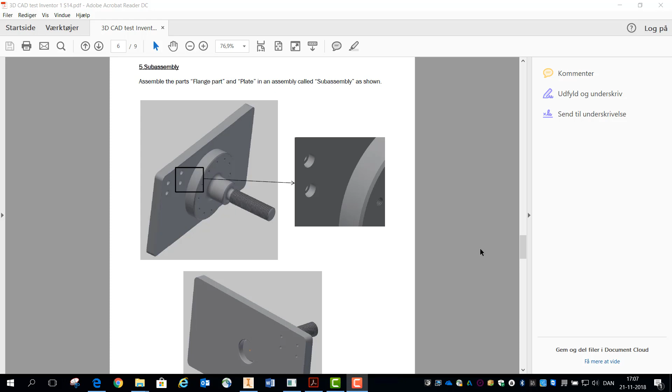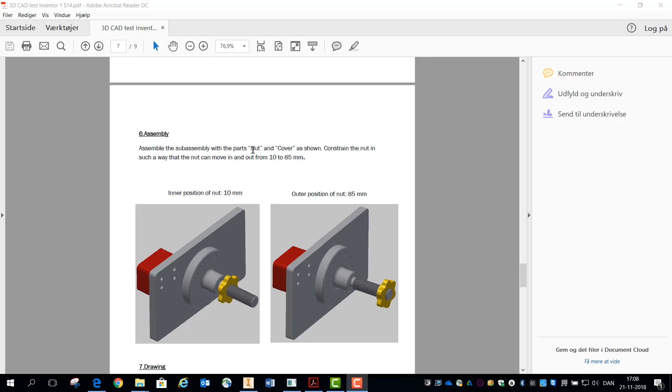So this is part 5 of the videos concerning this test, spring 2014. I'll now look into how we can do the assemblies. In the test we have a sub-assembly between the flange part and the plate, and then we will put the sub-assembly into a top assembly, we will say, where we also add the nut and the cover.

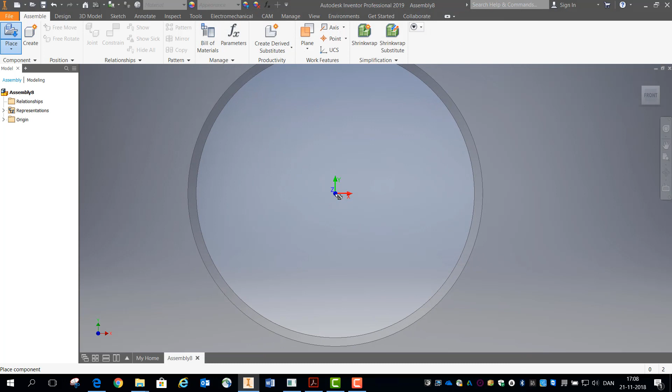But we'll start with the sub-assembly, and I will place up here my first part. I will browse for it, and I've saved it here, and I have my plate already in the window. And the first thing I'll do is actually place it grounded at origin. It's quite often a good idea. See what happens. We can carry on adding. I want to finish here.

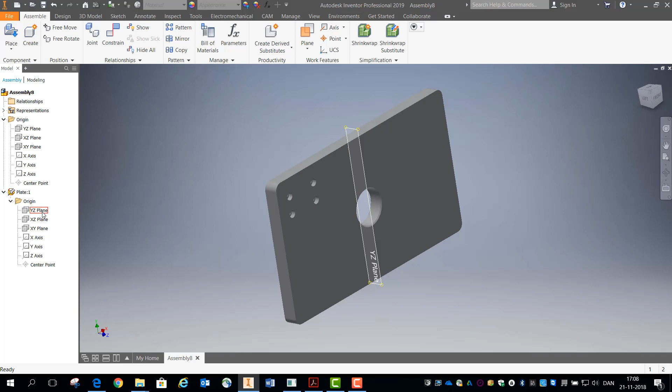So my first part is now placed grounded, you see, with that pin mark. And it means actually that you can see the XY plane on the parts and the startup origin is in the same level. So that's what it means. It is grounded now. It is not constrained really, but we just fixed it at that specific place, which is in the startup origin. You can see what happens if we take away the grounding.

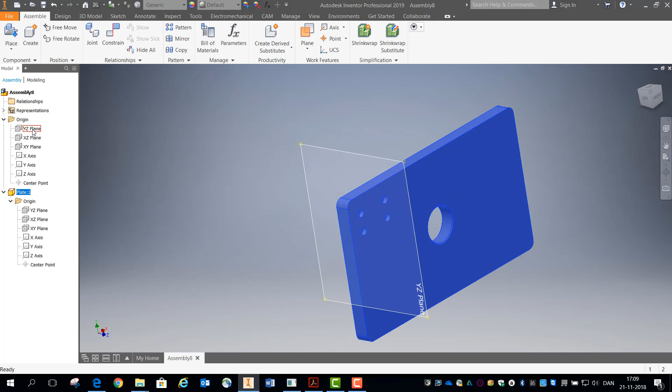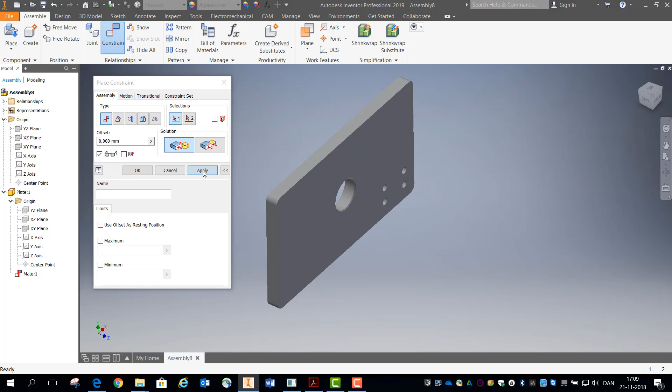Then we can actually move it, and you can see we have lost our connection to the startup planes. If you want a proper constraining, we can of course do that later. So if I now mate the startup YZ plane to the part, apply it. Same for XZ, apply. Also for XY, like that. And if I now apply it, it will probably complain.

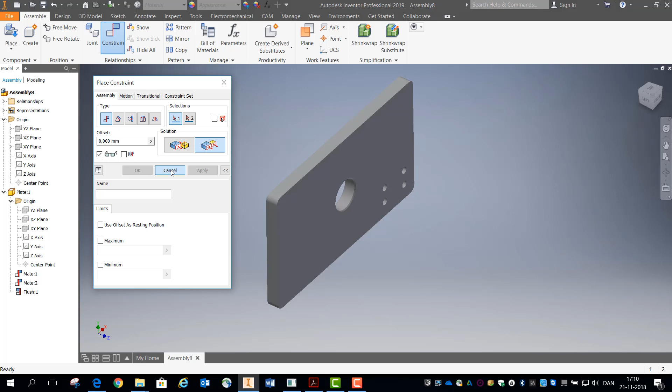And this is because I can't make it mated to each other, so I have to make it flush. So I do it again, XY and XY. It works better. So we're now back to the constraining. We don't really need to do the pin marks, the grounding, but we can actually do it. It's quite often a good idea that we ground the first part.

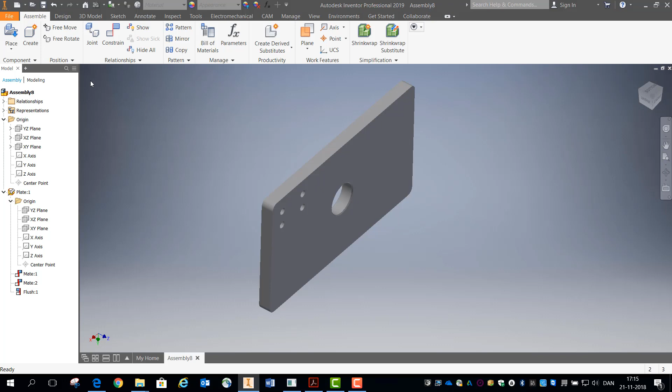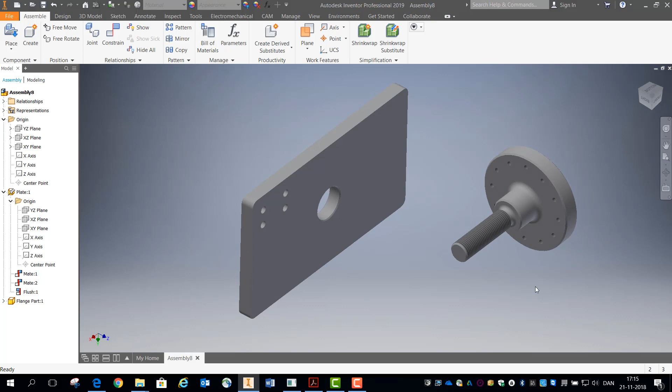Next I will add the flange part, so I place the new one, this one. I just click a random place, and then I can place more if I want. I want to finish here and leave my flange part here. First thing I would like to do, we can do several things here. We can constrain mate that to that one, and then we can add constraints between the planes, for example. So I could do that, or we could also use the joint option.

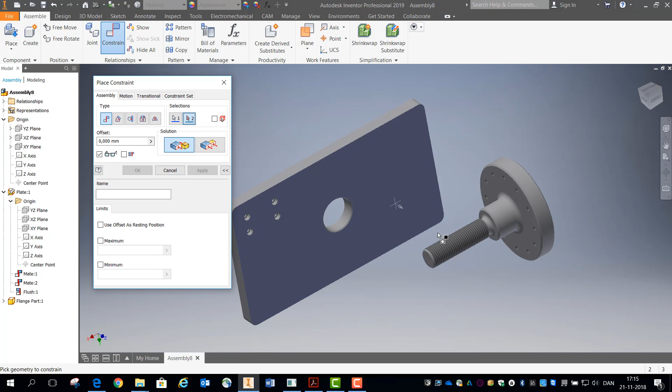I try with the mate option. So onto here. It's fine. Then I would like to mate the planes. Fine could be the YZ plane on the plate to find the origin on the flange part. It shouldn't be the YZ plane, but yeah, it could be anyway. It could be this XY plane, for example, or XZ. See what happens if I choose XZ. Do it like that. If I choose flush, it will turn it around like that. It's okay.

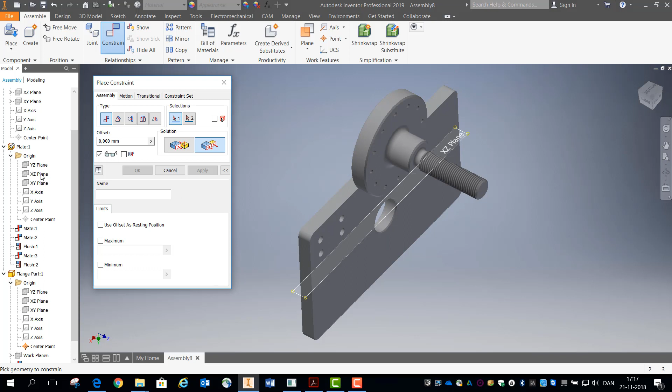Still, we can see, take it here, we can move it up and down because I haven't fixed it in the other direction. So I can of course do that. So I'll find the plate, correct this XZ plane, constrain that with the XY plane on my flange part. Let's see what happens. Not possible, because we need a flush here, probably. So I'll do it again. XZ on the plate, XY on the flange. Seems to be working better. So now we got full control of it.

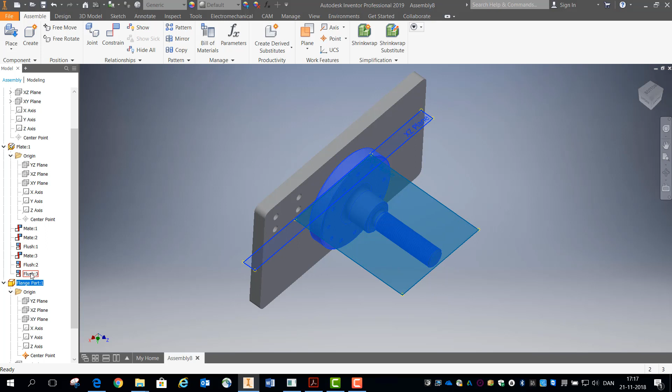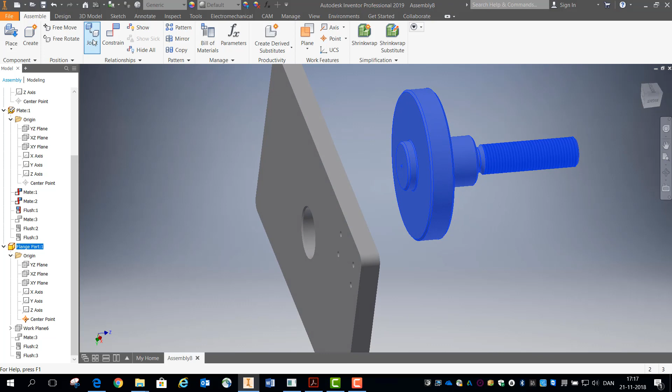We could choose a different approach. Could also show that if I now take away these constraints I have done, I can simply suppress them if I just want to. And they're still on, but they're not working. So I can now move it freely. If I now instead would like to use the joint option, I could do that. We've got different types. We've got rigid, rotational, slider, cylindrical, planar, ball.

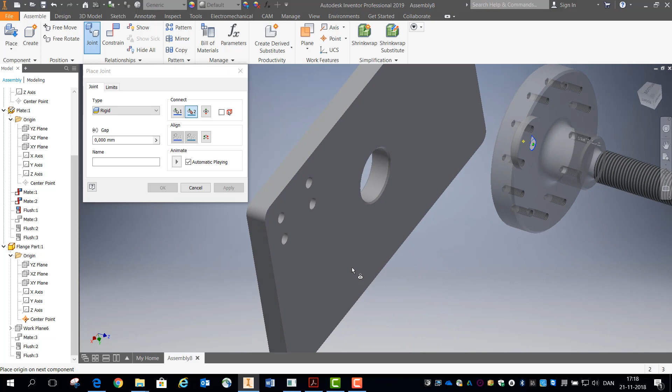I think actually here it is meant to be welded on, so it could actually be an idea to choose a rigid option. The first one I'll choose is actually the movable part, and this is the second part. Choose here. Click on that one and click on the surface. You see it is put nicely on like that. And that's actually what I want. We can reverse and invert alignment and flip the component, but it seems to be fine here. Press OK, and it's actually nicely done. So it's an easier way of doing it. So this will conclude the first part with the sub-assembly.

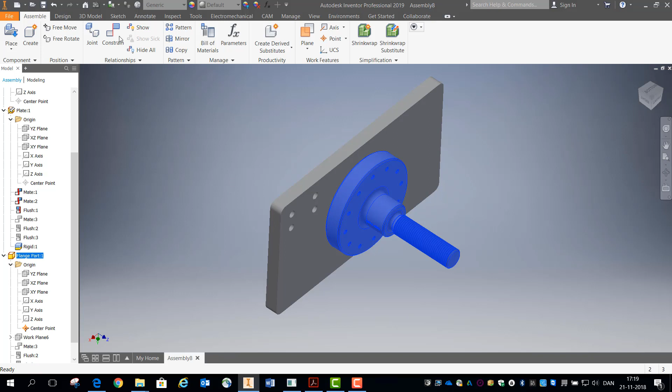And we of course need to save it, call it a sub-assembly.

Next we make the actual final assembly, where we have our sub-assembly, and we also add the cover and the nut to it. Let's have a look at that. We start up a new assembly.

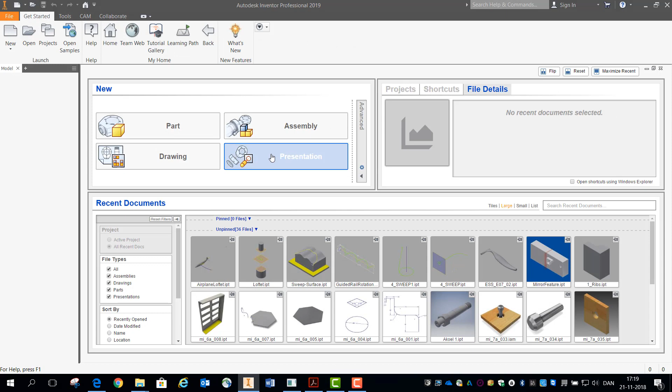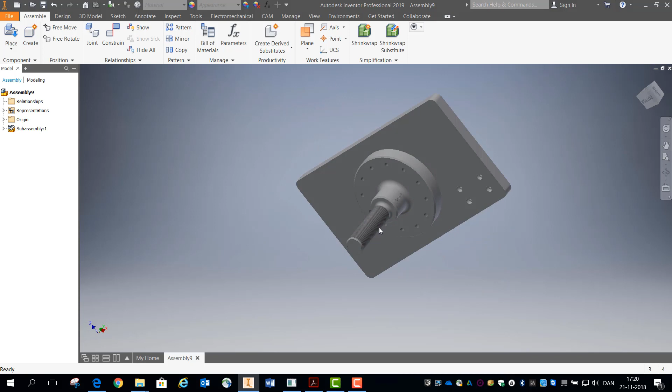We'll place the first component, which in this case is our sub-assembly, which I've just created. I place it grounded at origin, okay, like that, fine. I'll turn it around so it looks more like what we have on the exercise sheet.

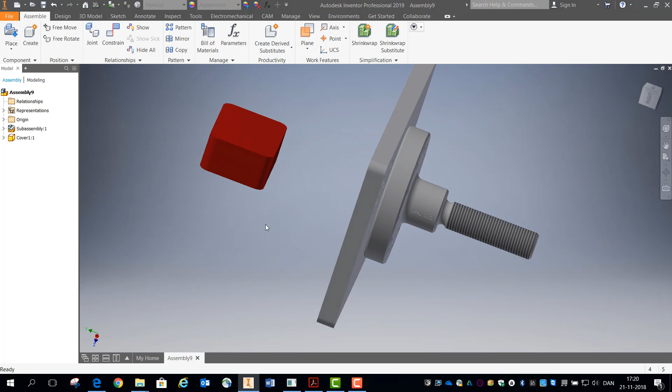The next thing I'd like to add is this cover. Place that, move it to the area, choose a cover, and click a random place. Notice I've painted this red so we can easily separate things. There are different ways of doing it. We can make a mate on the surfaces here, and then constrain the holes also.

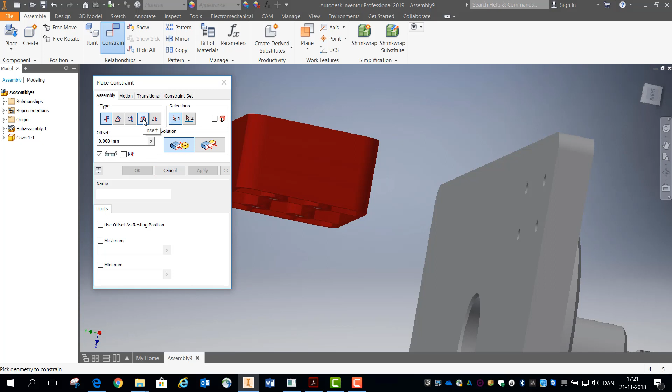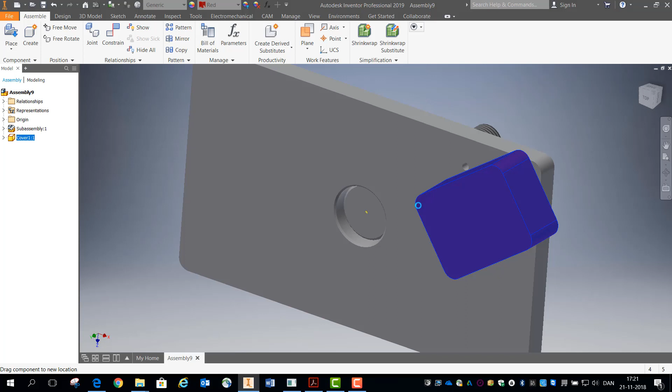But maybe the easiest way is to use the insert option, combining two mates. Let's try that: I pick this edge and insert that to that edge, something like that. If I now cancel it, we can see how we can move it now, like that. So it's partly fixed to each other.

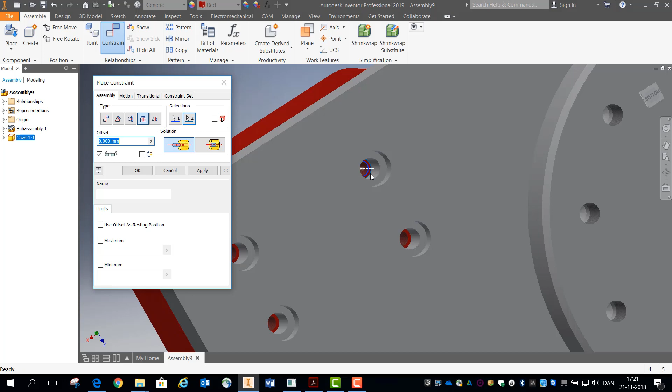So I need another constraint here, and put on another insert: this edge to find that edge in there, this one, and it's okay. It actually does the job for us. So I guess this is the easiest way of doing it.

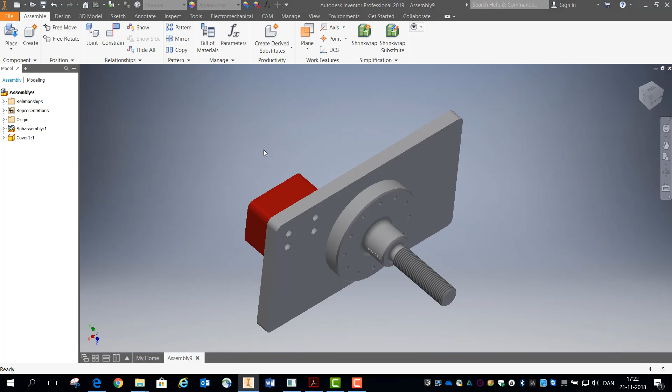Then we need to add the nut, the yellow nut. I've also put a color onto that one. I'll find it here and place it from my folder where I've done my stuff. I'll click a random place, leave it here, press OK, and it is now flying freely here.

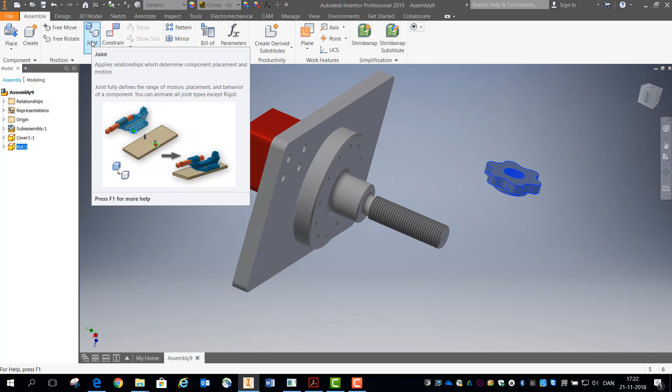I want to add it to this threaded shaft. We could do two things: we could use joint again if that's what we want, we have the options here. I guess the proper one would be a cylindrical option we could use.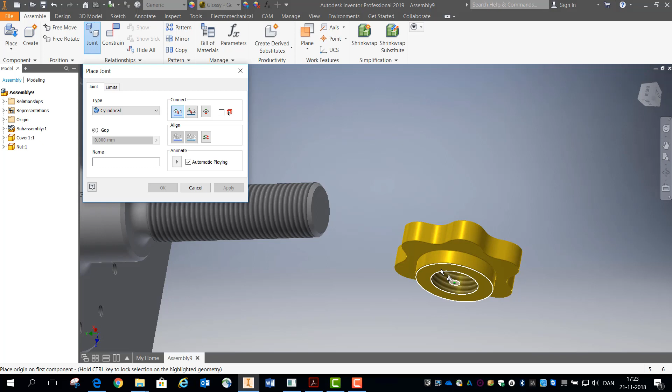We can try it out. We have to pick the movable part first, so that would be this one and two. You can see it's actually moving in, and it is a cylindrical option. We can add limits here if that's what we want.

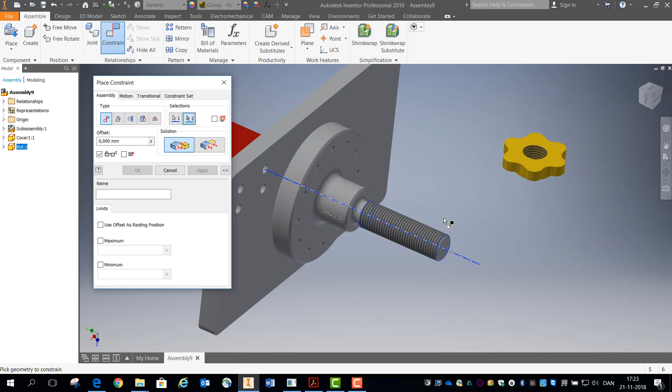Another way of doing it is using the constraint option. So we want to mate the center axis to the center axis of the nut. Seems to be okay, accept it. If I cancel this now, you can see we can move it in and out, and it can turn around.

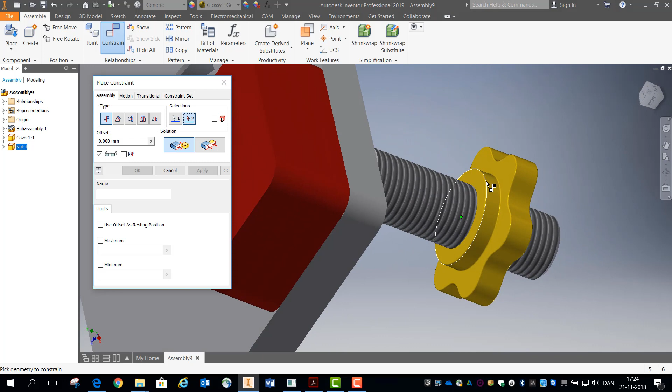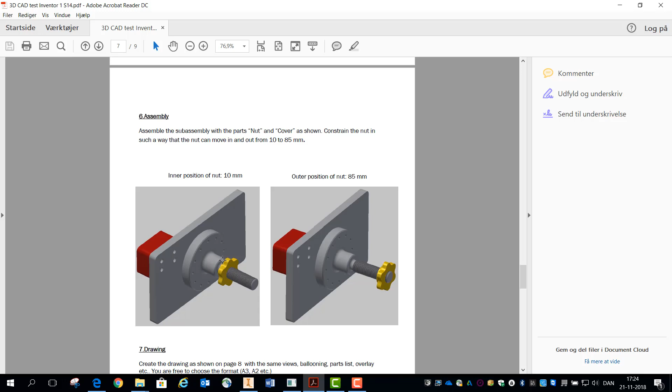If I now add another constraint here, this surface to that surface, and add a distance - I was mentioned it should be movable from 10 to 85, so we want a distance in here. I'll write 10 and apply, go directly to OK, and then it is on here with mate.

And we can move it around. If we want to control it a little better, we can do that. Find the origin for the sub-assembly, and for the nut we can add another constraint, maybe the XZ plane, and find a proper plane on the other part, maybe also XZ plane on the sub-assembly, like that. So we now constrained two planes, so we can't actually turn it now.

If you want to turn it, we can always suppress this one, and then see, it is again turnable.

Next, we'll have a look at this option, where we can move it from 10 to 85. Let's have a look at that one. If we move to my constraints, make constraint 10 millimeters. If I now edit this constraint and add some limits to it, then I can activate maximum and minimum. Minimum I'll stick with 10, and maximum I will add 85.

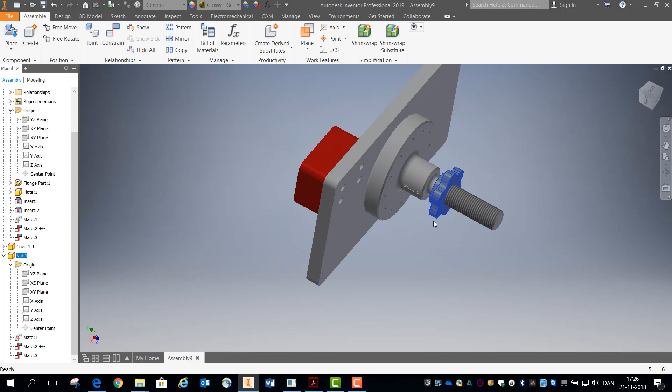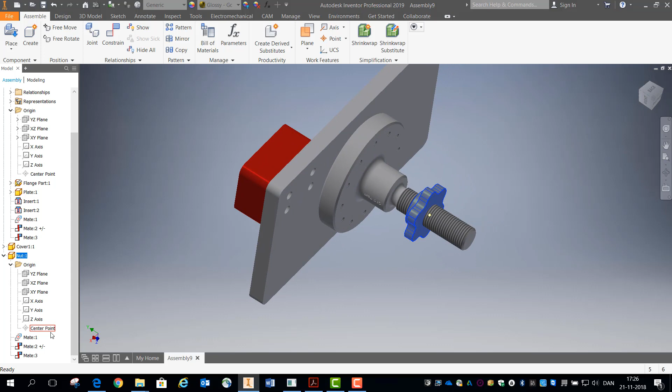So now we actually got limits on. See, when we are dragging it, we can move it those 75 distance. We haven't made a fancy constraint here where it actually is turning, and we'd have to look more into other constraint types, movable motion constraints. But we got what we want basically.

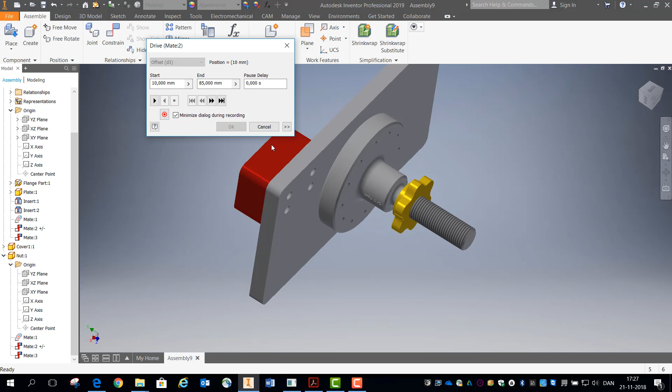If you now move into this mate constraint, right click on it and press drive, we can actually simulate what it does here. We can make a drive on it back and forth, and we can also record it if that's what we want. We can also choose how many times we want this - pick 10, it'll carry on like that, starting and going to the end. If we pick the other option, then it'll move back and forth nice and slowly.

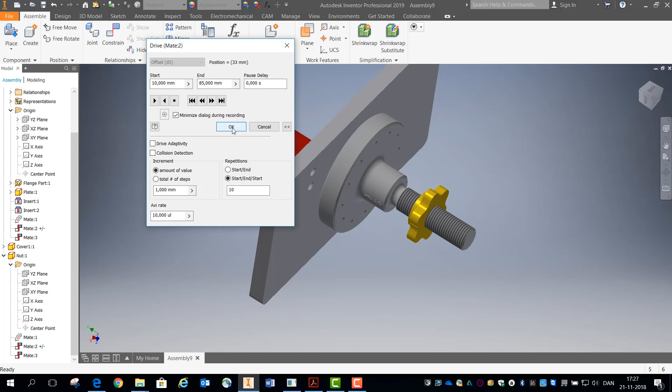So it seems to be okay. This will conclude the video with assembling the part. The next video I'll look into the drawing.